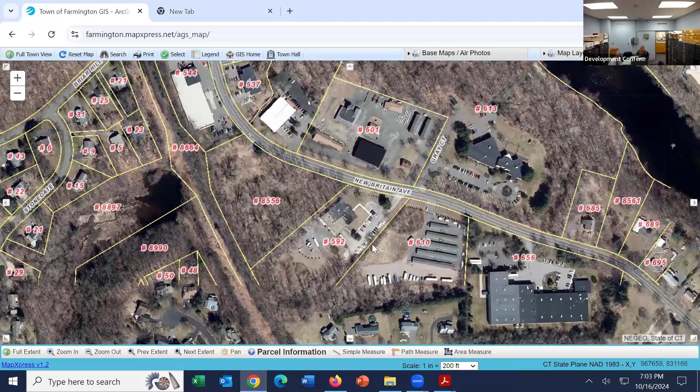Bruce is showing us where it is. There's the highway right there, and there's the vacant lot, and the M&J bus is right in this area here. So it's between the bus garage and the town garage, with the rails to trails in the rear of the property.

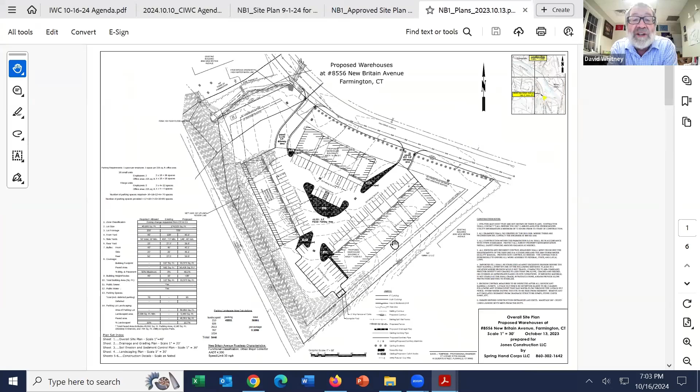Last year your commission approved a site plan for this property, including a considerable amount of activities within the 150-foot upland review area. I was not involved in the project at the time. This is the site plan here that you're seeing from that application. There are no wetlands on the site, or maybe just a small portion of Hyde Brook.

The only wetlands are the watercourse itself, which comes underneath the old train track, the rails to trails, and then flows down to New Britain Avenue on the town's property for the most part, and then goes underneath New Britain Avenue. There's no adjacent wetland soils like sometimes you have. The wetlands were delineated by Eric Davison from Davison Environmental, and there's a report on file.

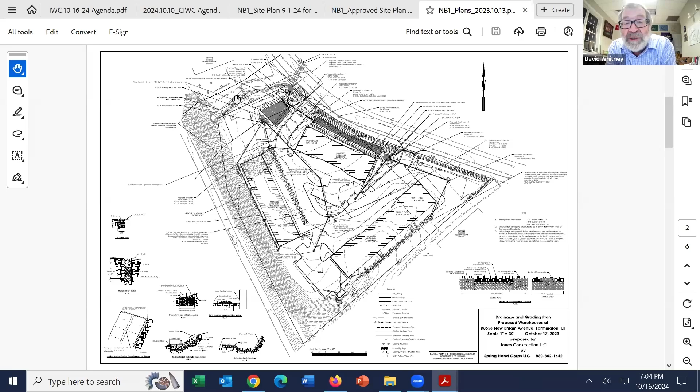Bruce, if you could just go to the site plan that I submitted with the application. So the Hyde Brook is shown in blue on the left-hand side of the map, and the 150-foot upland review area is shown in yellow. And if you see in the rear of the site, there's two shaded areas. Right there where Bruce has the cursor, the cross-hatched red area is the new area of impervious surface from the approved site plan.

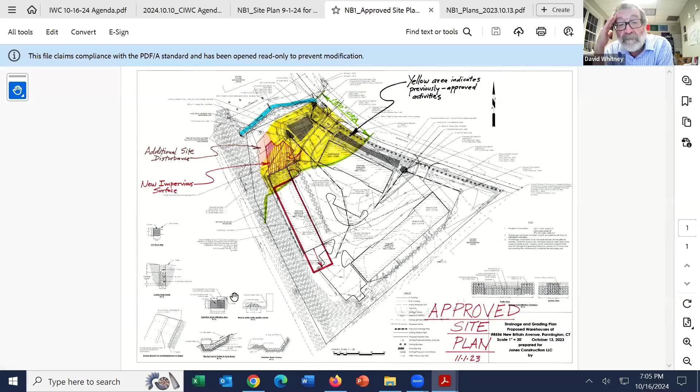And then the brown shaded area there is the new area of site disturbance. If we can go to the plan I sent today, the presentation plan - okay, I've superimposed on the original approved plan what we're requesting in this application.

You can see Hyde Brook is in blue there at the top of the screen. The site is a slightly different orientation on this original plan, but it's the same scale. You can see the green line is the limit of the 150-foot upland review area. That hasn't changed. The yellow shaded area are all the activities that were approved by your commission last year. It consists of an entrance driveway, a detention basin, portions of some buildings. All those activities were approved.

What we're requesting now is relatively minor, I think. We've slid the building in the back over to the northeast, where it's now outlined in red. That's the new location of the building as per the site plan I submitted with this application. And what we're proposing is to put an area of pavement at the northwest end of that building, shown here cross-hatched in red, which will provide some parking and will provide some bays in the building at the northwest end.

So we're adding some impervious surface, and again, that is 3,820 square feet.

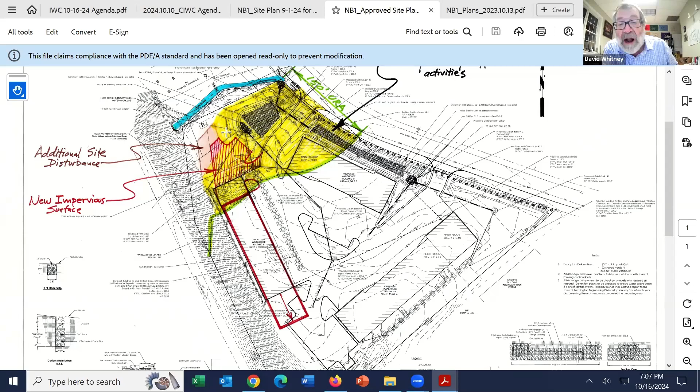Anytime you do construction, there's some site disturbance outside the actual pavement or buildings. I typically use 20 feet as the limit of disturbance, shown in brown where Bruce has the cursor. That additional site disturbance is about 1,600 square feet.

A couple of things I'd like to point out: the area of additional site disturbance that was not on the original plan has no mature trees, it's all scrub growth. And that area of additional disturbance will be vegetated after construction.

There will be plantings, we're working on the planting plan right now. There will be plantings in that brown shaded area and also in the area of that old shed that will be removed. We'll be proposing plantings between the new edge of pavement and Hyde Brook as part of the plan.

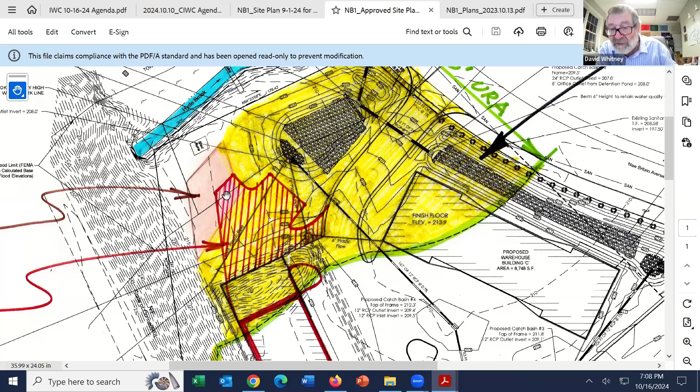The second thing I wanted to point out was the cross-hatched area of new impervious surface. The stormwater runoff will flow to a catch basin in the driveway and bring the stormwater back into the center of the site. Bruce, if we could go back to my plan that I submitted with the application.

If you could show the catch basin in the driveway there, right where he has the cursor, that's the catch basin that will pick up stormwater runoff from the new impervious parking lot and bring it back to our stormwater infiltration and treatment system, located underground in the middle of the site.

From the stormwater system, the discharge for larger storms will go to the detention basin that was previously approved. So what I'm trying to say is the stormwater runoff from the new impervious surface, the new parking area, will not discharge directly to the detention basin and will not discharge directly to Hyde Brook.

So this is a relatively minor change to the site. We've made some changes to the layout, to the buildings, to the storm drainage, to the parking lot from the original approved plan, but most of those changes are outside the 150-foot regulated area.

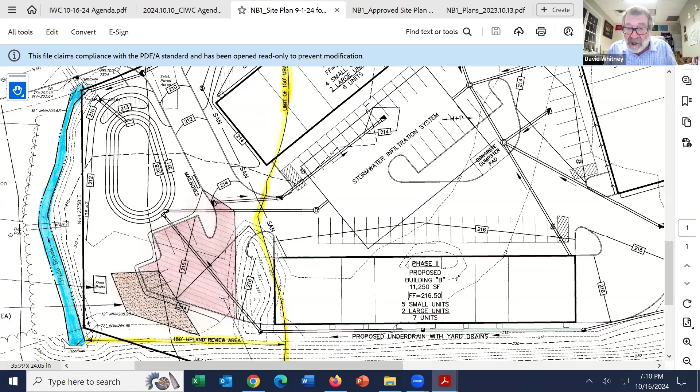So I guess basically that's it. I'd be happy to answer any questions. I guess the point of tonight's goal is to have this application hopefully accepted by the commission and to determine if you want a site walk, because I understand there are some new commissioners who weren't on the commission when this plan was approved, and to determine if this is significant enough to warrant a public hearing. I'd be happy to answer any questions.

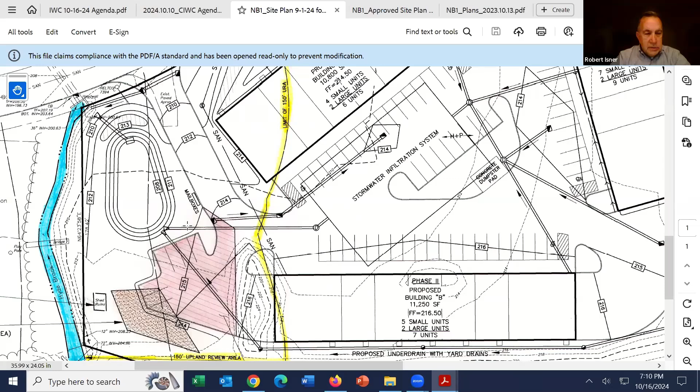David, thank you for the presentation. From my perspective, I don't see the changes as being overly extensive. Clearly you're adding some additional activity in the regulated area. One of the concerns the commission had during the original approval was the visibility of the site from the rails to trail path because it's so heavily used.

So it was good to hear that there are no additional mature trees being lost, it was all sort of scrub brush. But I think the overall planting plan from the original approval will be critical. I'll hear what the other commissioners have to say, but I don't think it will warrant an additional night of hearing, because I don't think the changes pose a significant impact to the wetlands. So those are my opening comments.

I'll go around to the commissioners. Commissioner Berlandi, any questions or comments? I would agree with what you just said. I don't think a site walk is needed, and I don't have any additional questions.

Thank you. Commissioner Fox? Dave, are you on mute? Sorry about that, there you go. I'll agree with you on the non-significance and no site walk.

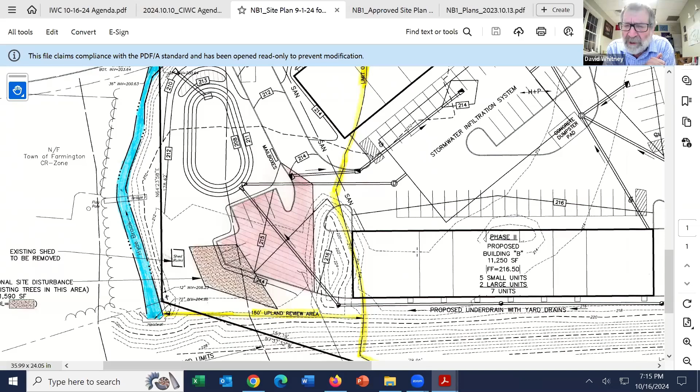So one of the requirements for planning and zoning is that the applicant submit a list of proposed tenants, like the type of tenants that will be using the buildings. So it's not intended to be like daily deliveries of materials. It's not really going to be a place where you stockpile storage materials. It'll more be for contractors to have bays for their equipment.

Yeah, mainly those. I mean, I know what previous commissioners have said, but I'm looking at those 3 parking spots. I don't know, we've approved residential property probably within 25 feet of wetlands. This is double that distance, but at the same time, it's a commercial application, which is different than a residential application in terms of usage and what type of contamination or whatever could happen. So I'm a little, personally, the commission can decide and vote which way they want to go, but I'm just a little concerned about those spots nudging ever closer to that brook.

That's pretty much it. I'll leave it as that, and we don't need a site visit. Thank you.

Thanks, Mark. Commissioner Toulon? Yeah, I actually was thinking, like Mr. Whitney referred, I am a newer member. I wasn't on the commission when this was first approved. So my initial thought was it wouldn't be a bad idea for me to see it, just because it looks like there's some minor changes to the original application, but I'll defer to the others and go along with it. I don't think it's necessary. I don't have any other questions.

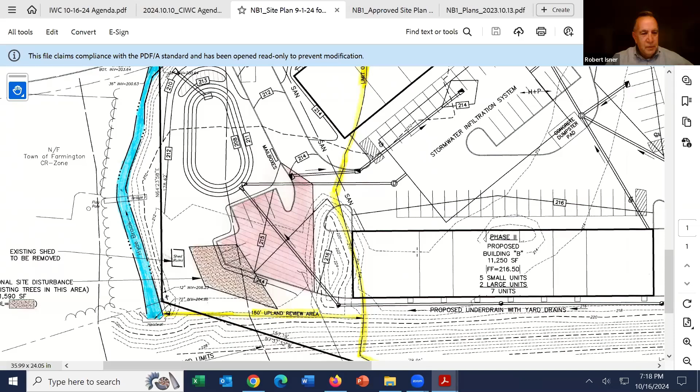So moved by Dave. Is there a second? I'll second it, this is Jay. Thank you. All those in favor signify by saying aye. Aye. Aye. Aye. Opposed? Abstaining? Motion carries. Thank you, gentlemen.

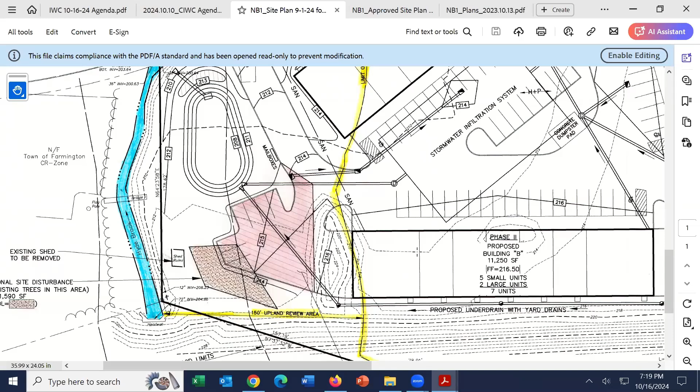Great, thank you very much. Hey, Robert, I just want to be clear, this is a new application, so the fact that I wasn't on the commission during the initial application doesn't stop me from seconding this, correct? That is correct. Okay, and thank you.

Bruce, correct me if I'm wrong, but yes, you're correct, Jay. This is a new application, so, yep, I think we're good with. Yeah, this is correct, this is a brand new application. So that's what I thought. I just wanted to be sure.

Thanks. So may I ask, when is the next meeting? And this will be an agenda item for discussion or vote at that meeting?

November 6th. Let me do my little cheat sheet. November 6th. Get some dates for two weeks out.

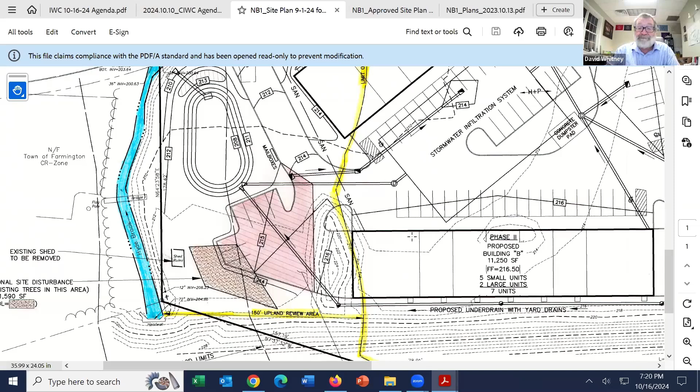Dave, I think we'd probably finish the discussion, and unless there's any major concerns that come up, good chance we'd be voted on next time as well. Thank you very much, Dave. You're welcome.

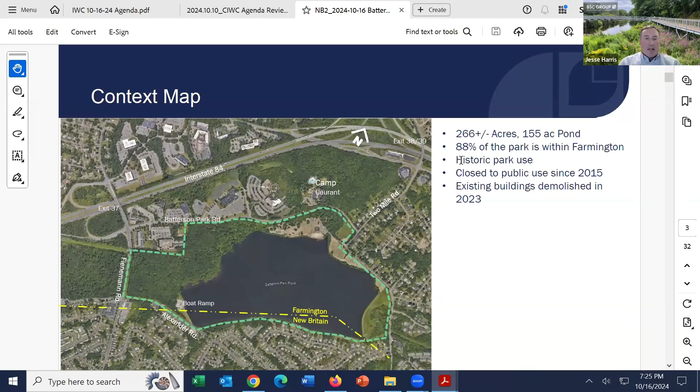Last year, as part of a more in-depth master planning effort that BSC Group was part of with the city of Hartford, prior to the change in direction of ownership or management that Paul mentioned, a series of on-site buildings, picnic tables, and pavilions were demolished and removed from the property. I believe that project came before this commission to get approval for that work as well. Next slide, Bruce.

The park, when we've been visiting, has been just kind of overgrown. The city did go out and mow some of that this year to try and keep up with maintenance, ahead of knowing that we're hoping to get improvements constructed in the next few months, over the winter and into spring of 2025. So they got a jump start on mowing some of the brush and overgrowth.

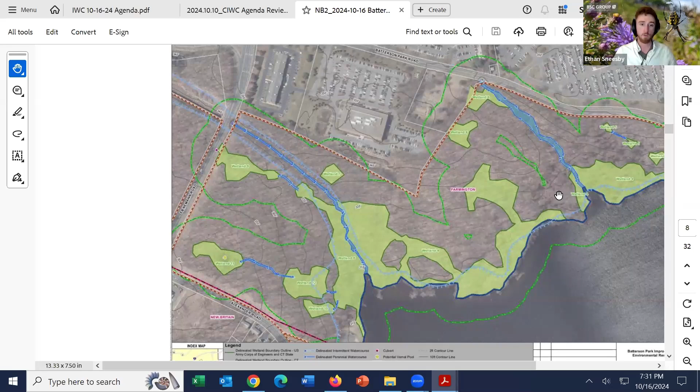A little bit more detail on wetland 4, one of the ones that's closest and incorporates quite a large area. The area closest to the development has a lot more scrub shrub cover, and has a higher percentage of invasive species in that area.

You get a fair amount of barberry and oriental bittersweet, and those sorts of species. That's essentially what we have going on here.

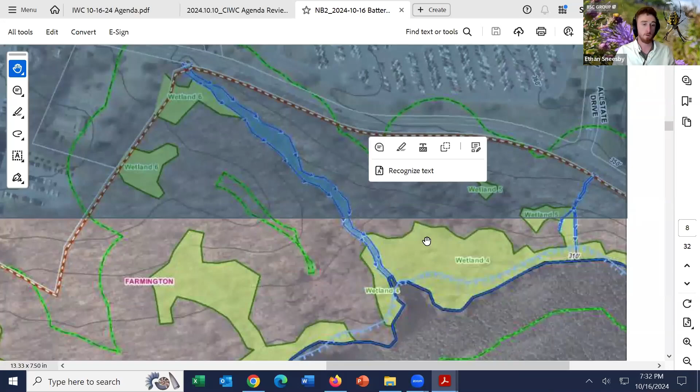Wetland 6 and 5 are both receiving stormwater flow as well as a bit of groundwater discharge in those areas. There are 3 perennial streams on the site: the large one that abuts wetland 6, the one within wetland 2, and the one that abuts wetland 8, southwest of here. The rest of the streams mapped on the site are all intermittent streams that tend to flow with rainfall.

I believe I have a lot of photos coming up in this slide that'll help give a little bit of an idea of what we're looking at in terms of what the wetlands look like. I think we can go to the next slide.

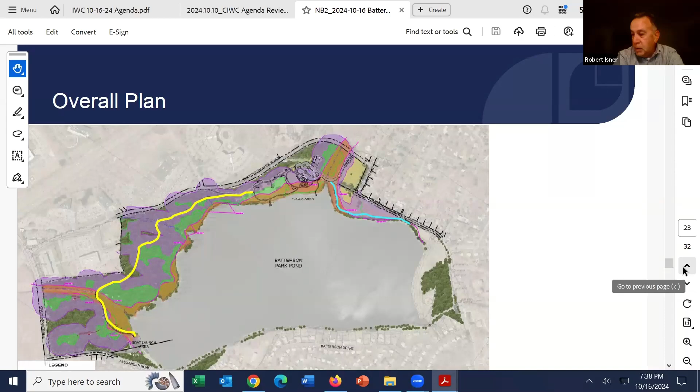For the vernal pool, this commission has talked a lot about vernal pools in the past, and we give heavy consideration to them. So if you weren't able to do the assessment of aquatic and amphibian life, I think for permitting purposes you should assume it is a vernal pool. If there is direct impact proposed with this application, my opinion would be for the commission to look for offsetting mitigation. I'd give a lot of consideration to recognizing that, while we have a 150-foot upland review area, the recommendation in the industry is to have a much greater protection area for a vernal pool. As we layer through the application process, I can touch on that—it would be important.

In terms of the impact areas, the vernal pool is actually the furthest wetland from any of the impacts. I believe we have a path going through the woods which would be outside of that upland review area for it as well. So of all the wetlands on site, I think it has the least chance of having any impact to it. Yeah, that's it right there—thank you for mousing over it.

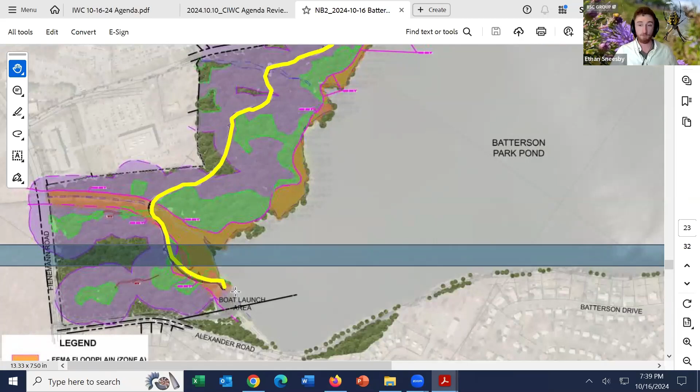I do agree that assuming it's a functional, high-value vernal pool is worthwhile. I fully agree with you there.

Thank you. I'll go around and ask the commissioners if there are other questions or comments. Commissioner Verlandy?

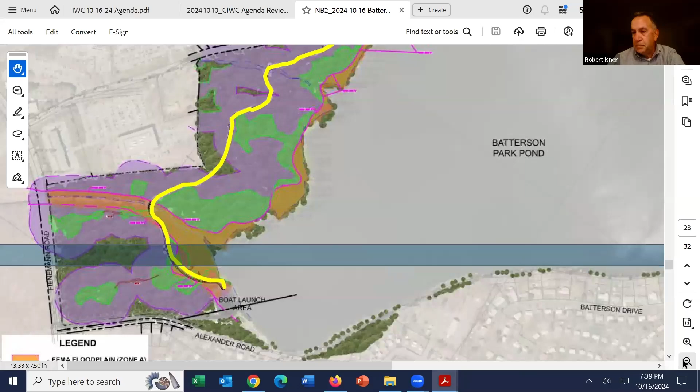I don't have any questions at this point, but I'd be interested to see further on. That's all I have.

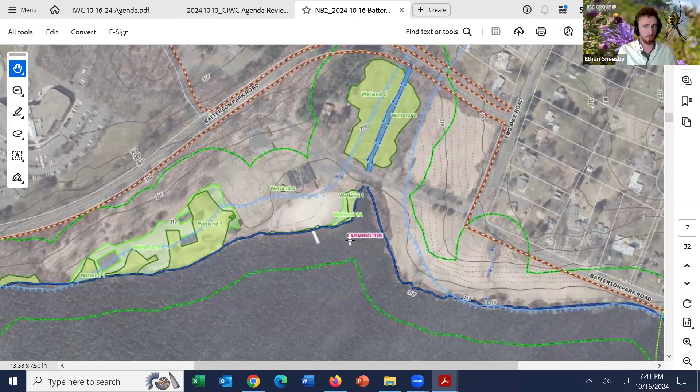There are viewing platforms planned within wetland 1, and a kayak launch is also going to be there. Those will be discussed a little bit further into the presentation.

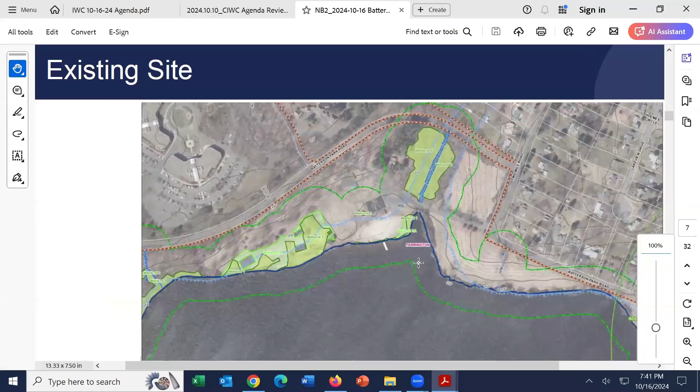I guess if you have specific questions about the wetlands, the impacts are specific to the wetlands. That's a good question.

Commissioner Kelsey asked about the asphalt. When the buildings were torn down, was any asphalt left, or has it all been taken out, or left undisturbed? None of the asphalt for the parking, the existing drive, or those three rectangular spaces has been removed - they're still there.

Are those actually in the wetlands area? When you say removing that will restore the functionality of the wetlands, can you expand on that? Yes, they are within the wetland. They're raised, probably with a base of gravel or something similar underneath the asphalt. The intent would be to remove the asphalt and bring it down to wetland grade so it could gain wetland hydrology and begin functioning as a wetland again.

On that mapping within wetland 1A, there are a couple of squares that seem a little odd - those are the courts, the basketball courts or picnic area that would be restored. I'll go into a little more detail on those later in the presentation.

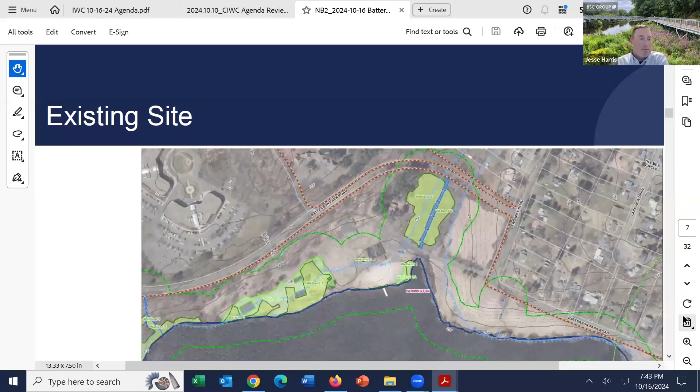Does any of the asphalt path go through the wetlands, and what are your plans for that? Yes, it does, and I'll go into that in a little more detail. Nothing further for me at this point.

Commissioner Simons: I have a few questions, but I'll hold them off until the end of the presentation. I definitely believe, having walked that path with my wife, that is a vernal pool, but I haven't done a species count, so I think it would be better to defer to that as an actual vernal pool if possible.

Commissioner Simpson: I appreciate the city of Hartford coming and giving us this presentation. It would be great to see this park functioning the way it was at one time. I don't have too many questions - I'll wait till the end of the presentation.

Reviewing all these wetlands, I guess we don't like to see disturbance of wetlands, but wetland number 3, the one by that building, was the one that was least functioning. With further presentation and probably a site visit, we'd better understand the impact of what you're talking about disturbing. So at this point I'll wait till further information.

Commissioner Tulin: I was actually thinking about wetland 3 and trying to be clear on exactly what that is. I caught the comment about that being a kind of critical area, but I'll wait to listen to the rest of the presentation before I think of anything else.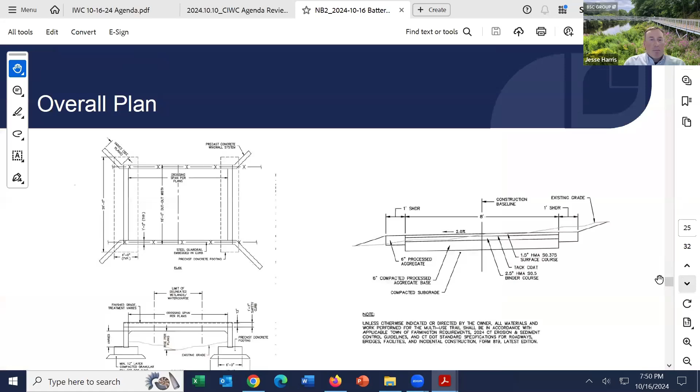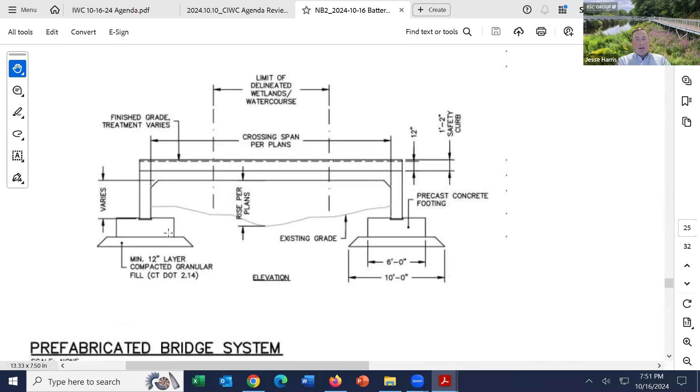And if you go to the next slide, Bruce, it consists of a prefabricated bridge section with its abutments well outside of the wetland limits that will span those distances. Those seem to work quite well in terms of constructability, minimal disturbance, and just ease of construction in these remote access areas.

If you look to the right, Bruce, there's a typical cross section of the trail where it's on grade. It's intended to be a paved multi-use trail, 8 foot wide, with 1 foot gravel dirt soil shoulders on either side, and a typical aggregate pavement cross section below that. The intent is that Riverfront will utilize that as their network of trails for events, but also for ease of maintenance, having it be a paved surface versus gravel—they feel that's easier for them to maintain long term.

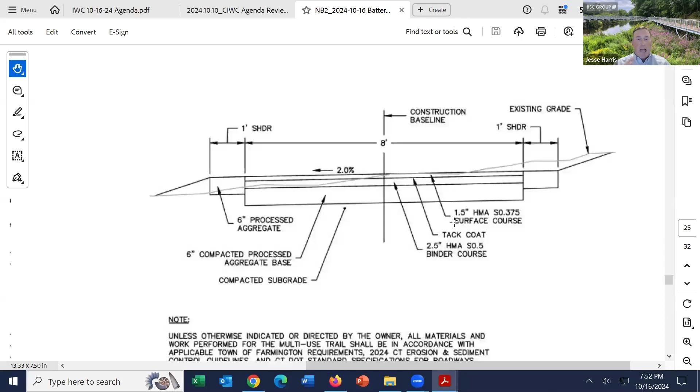And the 8 foot width is based on their desire to have a small maintenance vehicle access it to remove downed trees, even in the case of an emergency in these more remote locations—getting some sort of small emergency vehicle out there for those access points. Where we have that small portion of the boardwalk section by the boat ramp, again, that will meet the same width of 8 foot wide, to traverse that small section of wetlands.

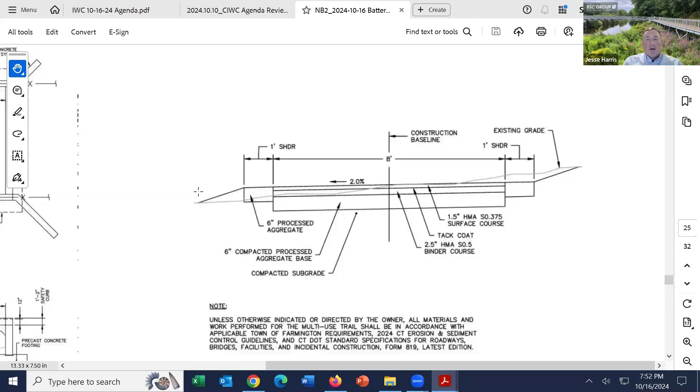Another important aspect of this trail is getting people out in nature, environmental education, and those type of activities. Next slide, Bruce.

So now we're going to zoom into approximately 20 acres in total, but probably really a 10 to 12 acre area of development. This has been the historical location of the park development with the old buildings, the old beach access and beach area, and the site drive. The existing access to the park is right at that tight corner between 2 Mile Road and Batterson Park Road.

We're proposing to close that off and turn that into emergency access only. It also functions as our utility right-of-way—there's overhead utilities, underground utilities, water, sewer, etc., so we need to maintain that right-of-way for that. We're proposing a new access road off of Batterson Park Road to the north.

This gets the park patron traffic away from the residential uses, captures any traffic flow coming from the south before it goes into the residential area, and functions better for the city's needs moving forward as an active passive park.

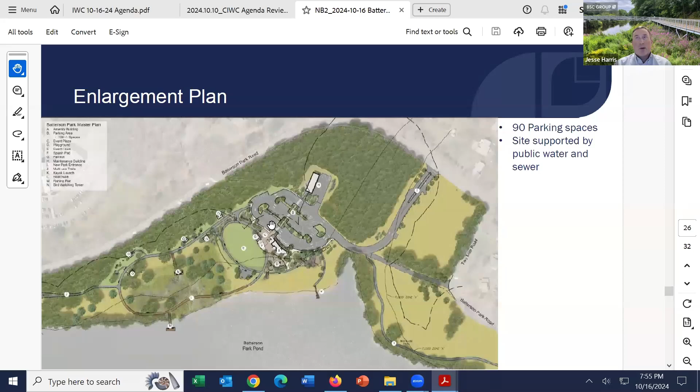Part of the park development is a new park support building, which will have restrooms and a small empty open concession space. There will be no food prep, just a space that vendors can come in and sell food off of hot plates.

That's kind of centrally located at A. We have a support plaza around that for functions and events, seating, tables, possibly some food trucks, that's at C. We've got a small playground of natural materials, so it'd be a wood playground with natural surfacing, at D.

E is our big event lawn. Just as perspective, this is generally sitting on top of the raised mound created by the historical leach field and septic system that supported the old bathrooms.

These new bathroom facilities will be serviced by public water and sewer pumped up to Batterson Park Road, so the old septic system and leach field will be abandoned. E will be that event lawn where they can pitch tents and it'll be a flexible space for them.

Moving out from this core area to H, we have a new maintenance garage, with this semi-remote location still under the ownership of the city of Hartford and managed by Riverfront Recapture. They're both based out of Hartford, so they need a place for maintenance staff and equipment to be on site year round. Again, the intent of this park is a 365-day park.

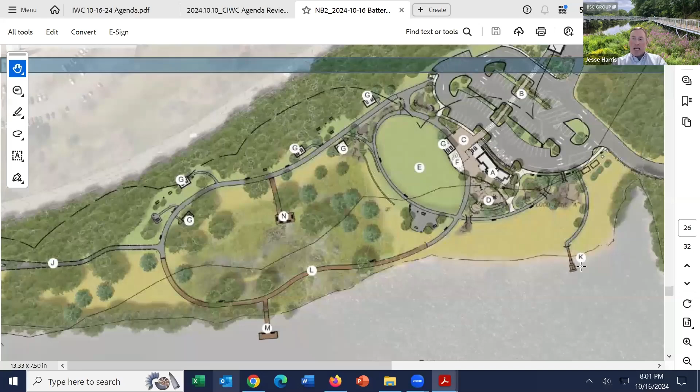Swinging back around to letter K, Riverfront does have a desire to provide non-motorized water access with canoes and kayaks. They're proposing a floating dock system with accessibility improvements for handicapped or mobility-impaired people to gain access to their kayaks or canoes and launch from that point out into the pond.

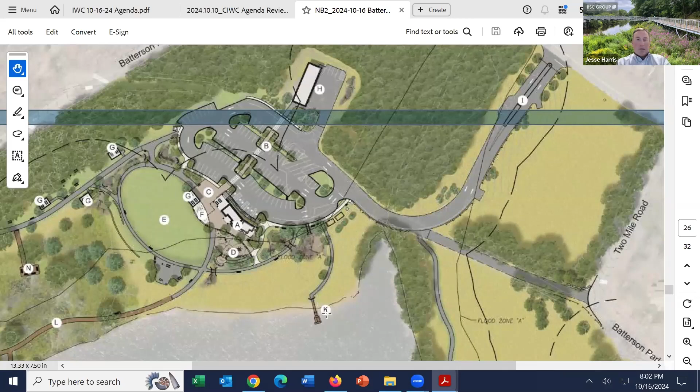So that is one of those areas, about 600 square feet, that we'll be looking to mitigate on site.

Just to reiterate on this one, work within the wetlands totals 4,800 square feet, due to that pocket wetland in the center of the site, with helical piles driven for boardwalk supports, not only in this location but also on that trail connecting down to the boat ramp, plus some minor work for anchorages.

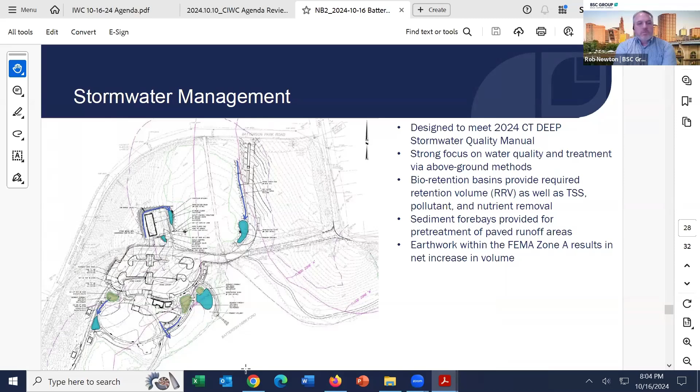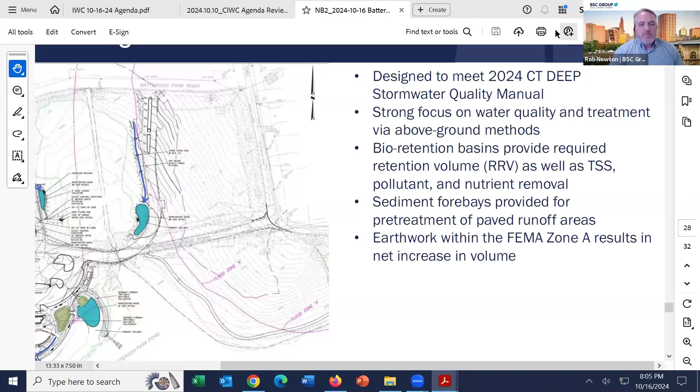Thank you, Jesse. Really, our concept for stormwater management on this property is promoting a lot of overland flow and focusing on water quality. We're looking at creating five above-ground bioretention basins that will help remove any sediments or contaminants that may enter the stormwater flow. I think this will provide the water quality that we need and desire entering into Batterson Park, Batterson Pond. So our focus is to promote water quality.

The soils here, and the topography of the land, really lend themselves to that overland flow, and we try to capture that water and that stormwater quality volume in each one of these basins. We are exceeding the water quality manual's recommendations for stormwater quality volume on the site by use of these basins.

Any stormwater generated from the paved areas will enter a sediment forebay prior to entering into the water quality bioretention basins. We try to capture any of the initial sediments into those sediment forebays, and then the water moves into the bioretention basins. Each basin is designed to safely pass any excess stormwater in a major storm event, and prevent erosion from those major storm events. So our focus here is the water quality volume and maintaining that cleansing of the water prior to entering into the pond.

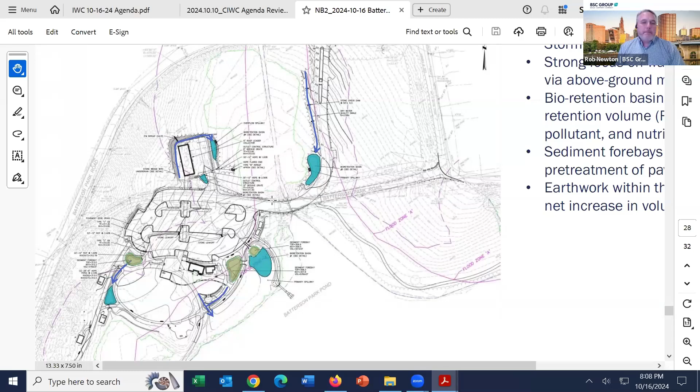To close this out, planting plans show all disturbed areas will be stabilized with either lawn, plants, or conservation seeding. Conservation seeding is highlighted in the darker green, around all the periphery areas. The lighter green areas are intended to be maintained lawn with weekly mowings, while conservation seeded areas would be maintained seasonally.

There's some existing meadows and upland areas that will also be seasonally maintained. As part of the planting plan, we have 102 new trees proposed, including 12 different species of native or adapted species.

The aesthetic and approach to the planting design is really to keep with the pastoral setting that's out there today, meadows, flowing grasses blowing in the wind. And of course we have trees for shading of pavement and the plazas around the core areas, shading for people to sit and relax and enjoy the outdoors and the view of the pond. The plantings will also help support the bioretention basins in their functions.

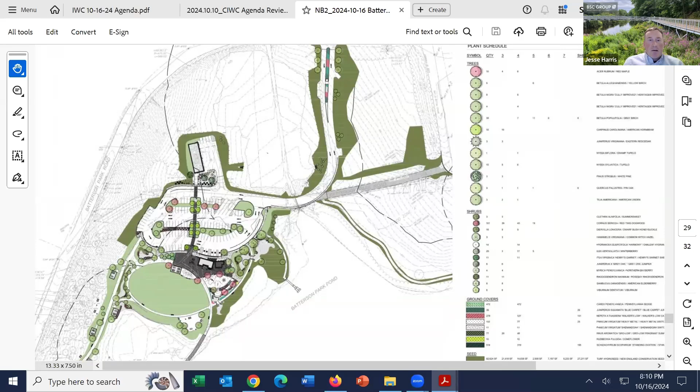Next slide, Bruce. So focusing a bit more on the wetland mitigation restoration areas, we talked about this before. Highlighted in cyan are the paved areas, totaling approximately 17,850 square feet of impervious surface within wetland one. This is the larger area.

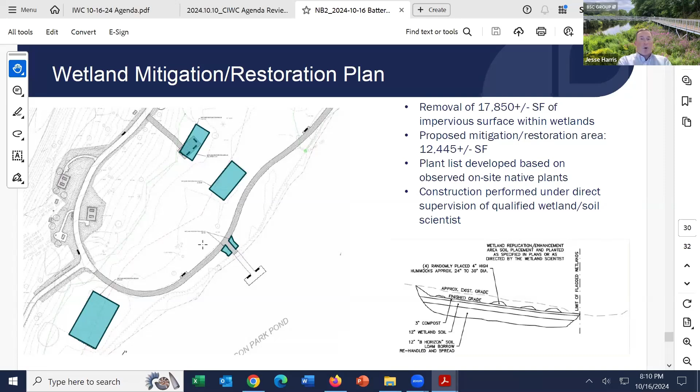We're proposing as part of the mitigation restoration 12,445 square feet. To be conservative, I did not include the area directly under the boardwalk, because that will be shaded. There'll obviously be hydraulic connectivity and function there, but the vegetation will be sparse because of the shade from the boardwalk.

The plant list proposed for these restoration areas will be developed based on observed native plant communities on site, so those will work in harmony with what's out there today. It's shown in the cross section here.

As Ethan mentioned, we're going to remove the asphalt paving, the impervious surface, and the gravel base, bringing that elevation back down to a level that provides and expands the function of the wetland. There'll be a new cross section of wetland soils and plant material. That work will be directly supervised by someone like Ethan or another wetland soil scientist we have on staff.

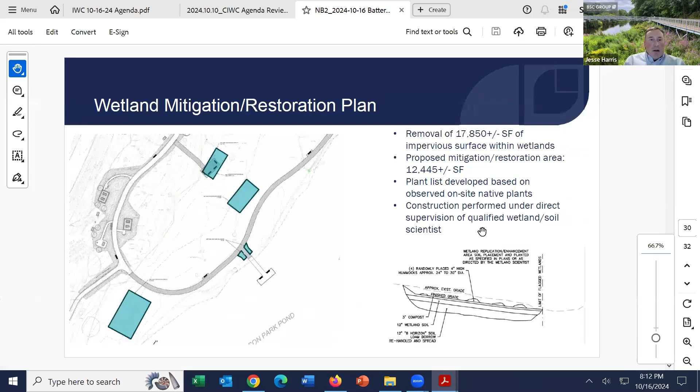I believe that's it. I really appreciate the commission sticking with us through this long presentation. It's a large site with a lot of complex natural resources out here. We're really excited to be at this point with this project, to be in front of you tonight. BSC Group has been involved since early last year, so we're excited to get this project moving and get it back open to the public in the middle of 2025.

Thank you all for that presentation. You obviously presented quite a bit of material. I do have a couple of procedural questions for Bruce.

Because we're close to New Britain, they just have to be notified of the application, correct, or do they also have a review and approval? No, there's just a notification, because there's no actual impact in New Britain.

And is there any jurisdiction with the Army Corps or DEEP, or are we just doing our review and action independently, and any other approvals would occur concurrently but wouldn't affect what we do, correct? At this time, no, because I'm going by the estimates they put together. We haven't had a lot of time to review these in full, but I think they are under 5,000 square feet of disturbance, and there are no Army Corps wetlands being impacted.

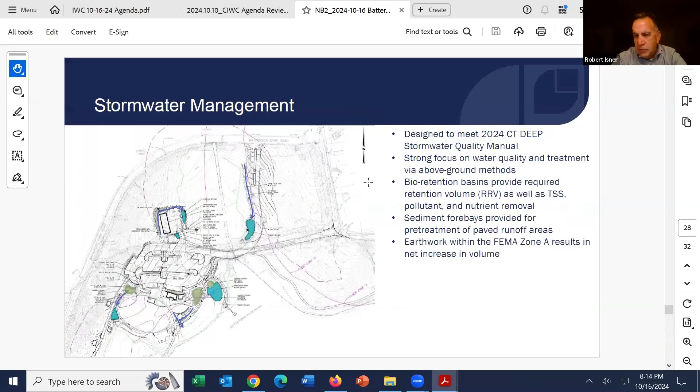Okay, great. I'll start with some questions, and I'm not sure who on the presentation team will handle this. What's the rationale for the new access location, because it looks like there's a fair amount of grading and a lot of work within the regulated area? Is there any direct wetland impact for the new access road? No, there is no direct wetland impact, we're outside of the wetland itself.

We're capturing sheet flow from that paved surface along the western edge with a vegetated swale, and that comes down to one of those bioretention areas right at the bend where it will discharge to the wetland, but there is no direct wetland impact in that area.

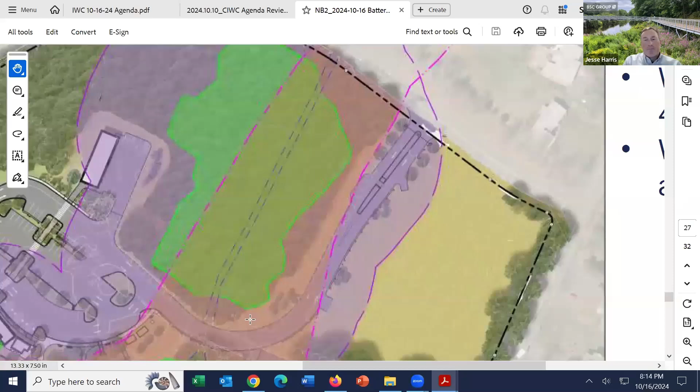Why is the new access point preferred over improving the existing access? A couple things: one is the messy nature of that corner intersection. The geometry isn't quite right there, and the width of our driveway on site is constrained by utility poles, plus large mature oak trees we want to preserve, and some topography changes. Looking back at the pictures I showed earlier, it's not a full 24-foot width, so we wouldn't get clear two-way traffic through there. We discussed this early on with the Chief of Police and the town engineer, looking at a way to get that traffic and entrance out of that corner.

I'll move on to the other commissioners since there are probably a lot of questions. My perspective for the rest of the commission would be definitely to do a site walk, and I'm thinking this would have to be a public hearing, given there's 4,000 plus square feet of direct fill area and acres of work within a regulated area. But I'll hear from the other commissioners.

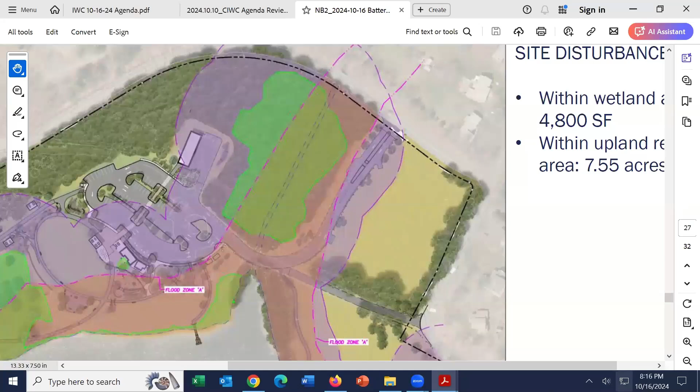I had an additional follow-up about the access road. Looking at this presentation this afternoon, on page 32 it shows an access road that's a little further away from the wetlands. I was wondering if that's still being considered.

We had a meeting with town staff last week, and this was something Bruce brought up. In response, we looked at that option. There is an option to pull it further away and actually maintain the existing tree line that runs along the bottom of the slope there. So that is a feasible option we could consider.

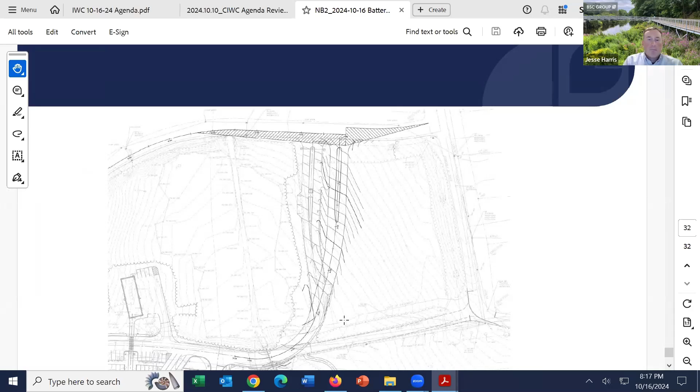Okay, thank you. That's all I have at this time.

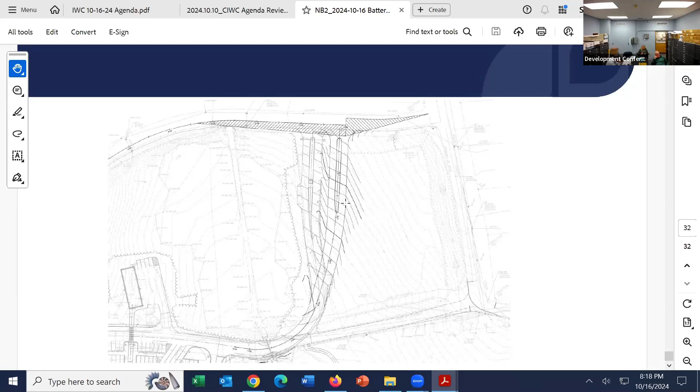Commissioner Kelsey: I agree with Commissioner Eisner on significance, site walk, and public hearing. Just a couple quick things now, and I'm sure I'll have more as we go through the process. On the trail: are the raised boardwalks and bridges going to have railings? And my understanding is that trail is primarily asphalt. From rails to trails, we've had continual problems where tree roots grow up, buckle the pavement, and eventually create a safety issue, requiring them to be dug up and redone. I'd like to hear your thoughts on how to mitigate that, or your plans for maintaining and keeping the trail safe over time.

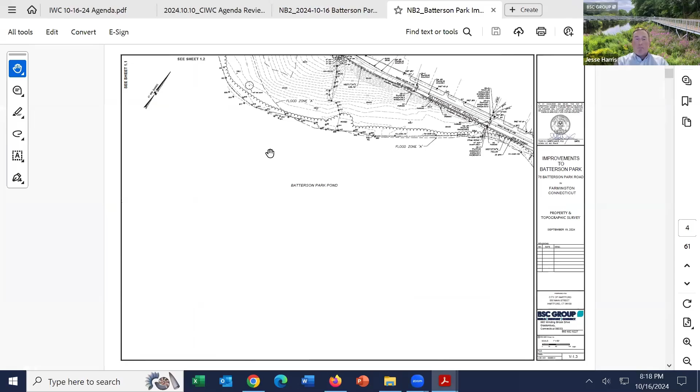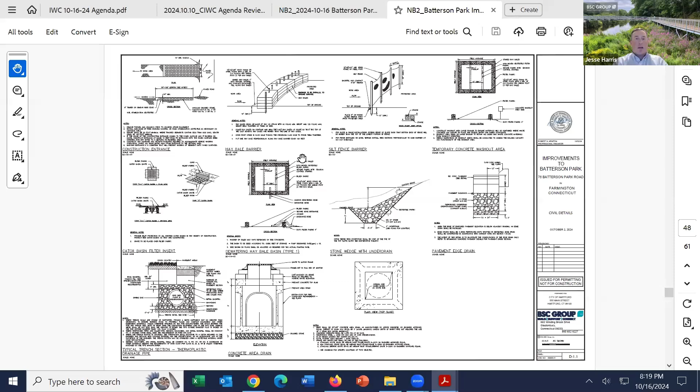The boardwalk through the wet meadow is intended to be very low, so there'd be a curb but no railings—we wouldn't exceed the 30-inch height difference. That's to minimize visual impact, both within the park and for the housing across the pond, avoiding big rails obstructing views. Where things cross the stream channels, there will be some sort of guard or fence to prevent people from falling off the edge. That's a good reference image of the boardwalk through the wet meadow.

On the tree roots, that's a tough one—Mother Nature's going to do what she does, and we can do our best to maintain it. It's a compromise of tree health and mortality, and maintenance. Riverfront Recapture will maintain this park in perpetuity, and those things will be part of their operations and maintenance plan. Those members aren't here to speak about that tonight, but hopefully as we go through this process, if we need to, they can attend.

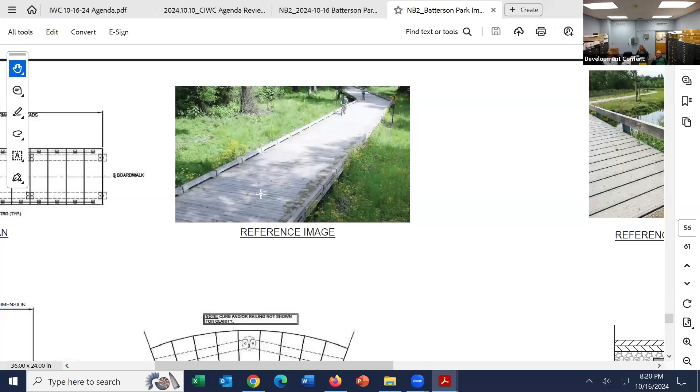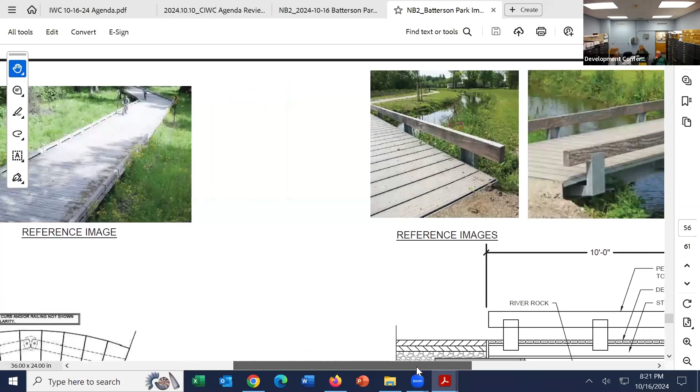Down the road, I'd like to hear more about whether you're cutting any trees or clearing any canopies, because all that maintenance work has occurred on the rails and trails—if you go through it, you'll see trees along the trail cut down to try to prevent roots from coming back up. So if there are any plans around that, I'd like to hear about them. That's all I had tonight.

Thank you. Commissioner Simons?

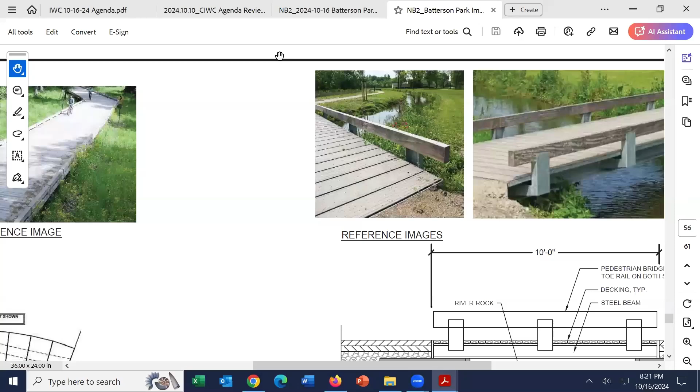Yes, I've been following this closely. I know there's a $10 million grant, and there's even a proposal for the Passport to Parks fee to increase to make sure everything sustains. But my question, since this area has been neglected for 10 years, is there a master plan for resilience in case the proposed 50-cent increase doesn't go through and the $10 million gets exhausted? Is there a plan to make sure what you're installing is strong enough to withstand not being maintained for a time, in case of financial difficulty? I feel like I'm being a Debbie Downer, but I need to voice that, especially since this has been 10 years in the making.

Through you, Chair, if I may. Paul Drumming, City of Hartford. Great question. So we're taking measures. A portion of this funding from the state, the $10 million, is going to be put aside in a lockbox for future capital improvements years down the road when things need it. And then the day-to-day oversight and maintenance of the facility will lend itself to extended life on all the elements within the park.

One good example of that long-term durability is the boardwalk itself. We're looking at a precast concrete product versus wood. Concrete is much more durable than wood—it doesn't warp, doesn't check, doesn't catch fire if that happened. So those are some of the things we'll look at as we get closer and really start crunching numbers to see what fits within the budget. I'd also put out there that some of this could be phased depending on how the numbers come in.

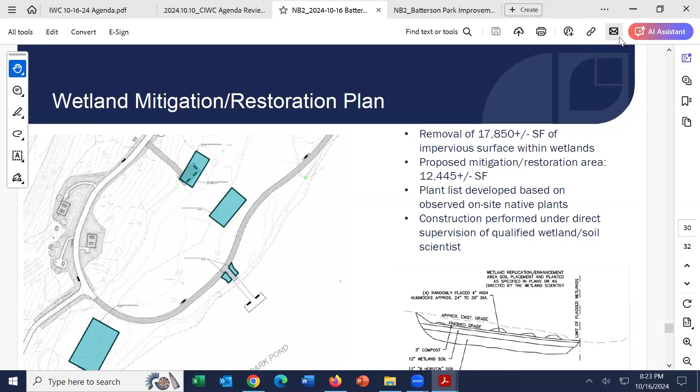Commissioner Tulin? He stepped out. Okay, he had to excuse himself. Sure, okay. Then I'll have the final word from the commission.

I think as the application moves forward, additional enhancement for mitigation of the vernal pool would be good. I know you said that area isn't going to be actively developed, but I think it's probably a unique resource on the property. It's really a balancing act—you're going to revitalize the whole area, balancing some impacts offset by increased enjoyment, recreation, and education values. So giving consideration to what can be done to protect and enhance the vernal pool long term would be a nice addition to the overall plan.

So Bruce, I think at this point we'll accept the application, and then you'll work on scheduling a site walk. It's a big site, a lot to cover. So administratively, Bruce, is that correct for our next steps? Yeah, I'd like to accept the application, and due to the complexity of the site walk, I'd like to have a 5-minute discussion with everybody and the applicant so we can choose a date that everyone feels is acceptable.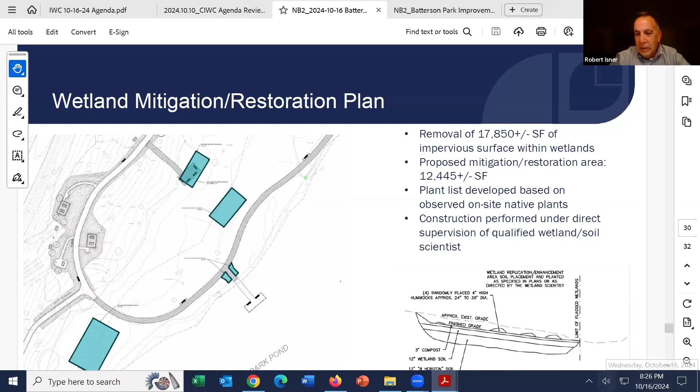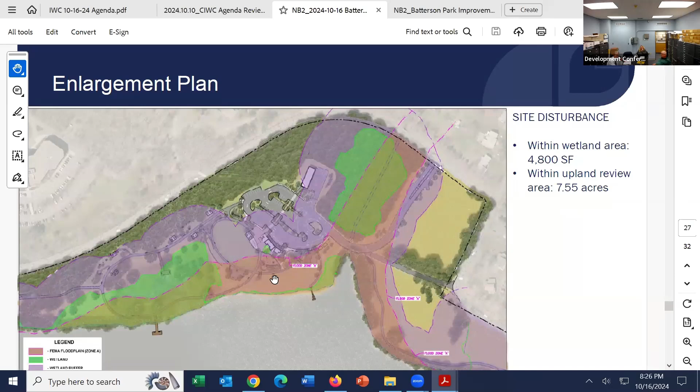I think so the applicant is aware, for the site walk we're probably talking about key areas—looking at this driveway entrance here, up along the wetlands, proceeding down through here, and from there whether the commission wants to continue to the vernal pool, doing the whole walk out to the far end to the boat ramp. So is that what we're looking at? Maybe a couple of these stream crossings too, to get a gauge of understanding. The wetland is over here, with potential vernal pools here, which ties back into the boat ramp, so I'm assuming we'd want to walk a portion of this as well.

Is it readily walkable, Bruce? I'm assuming the brush isn't overly difficult, but I can't answer that because I haven't walked this deep. It would probably be worth coming in from the boat ramp for the wetlands, and then coming in from the park for the development area. That tighter area is fairly thick and pretty steep in parts. The flat parts are fairly brushy and the steep parts are steep, so it might be worth coming in from the other side.

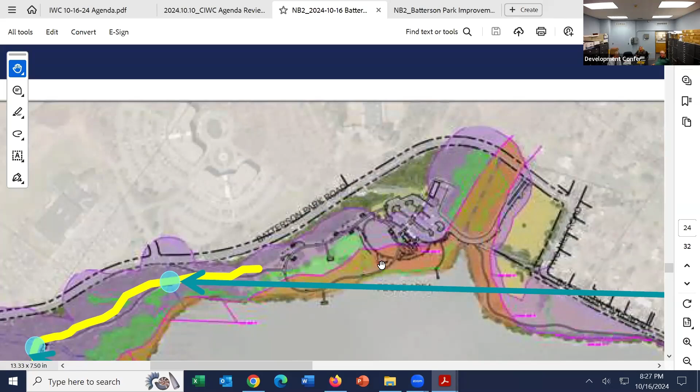We'd also want to see any of the wetland flagging that's there, so the commission could understand where the wetlands are. I think we know the general locations, but understanding this location with the driveway, as well as some of the flagging out here for this wetland and this vernal pool, so the commission can understand where the trail is in relation to these improvements, as well as the driveway into them. Do you guys need any timing to walk out there and make sure that's done?

The flags to the south where that vernal pool is were recently done, so those should all still be out there. The flags to the north along this driveway, that's all wooded, those should still be there too. The ones in the meadow, I'm not sure - those were little wire flags with pink ribbon, and I don't know how extensive the mowing was that was just done a few weeks ago, if they went crazy and mowed all that.

If I may, could BSC get somebody out there before end of business on Friday to make sure all the flags are in place, if the commission was available on a beautiful weekend like this one?

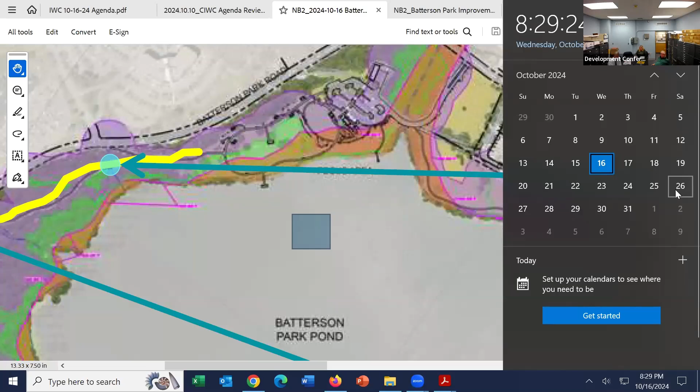I think this week may be a little soon for some other people as well. So I've got a few dates here - maybe thinking as early as the 20th or the weekend after. That would probably be looking at... let me get my calendar. The 19th is a no, so maybe the 20th, the 26th, or the 27th. How are those dates for everybody?

I could do the 20th or the 27th. Same for me, I can do the 20th or 27th. I cannot do the 26th. All right, 20th or 27th is looking good, so either one of those dates.

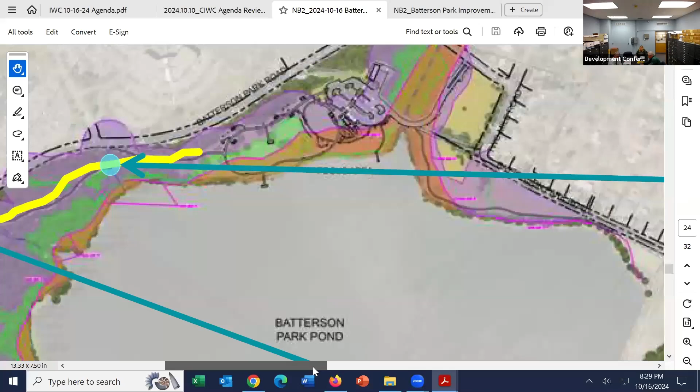Anybody else have any bad times in there? And again, BSC or BCI, if any of these are bad dates, just give us a holler if you can. They'll be available. Have some of you guys as well as Ethan there too. We'll make ourselves available. Absolutely. Paul, can you be available? Yes, they'll be available.

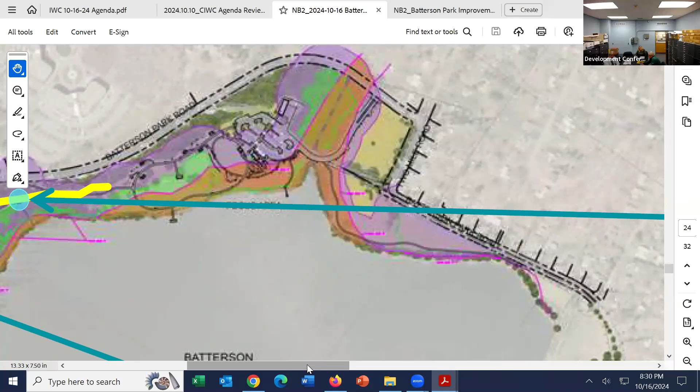I can't do the 20th, Commissioner, but I can do the 26th or 27th. All right, so the 27th seems to be an acceptable date for everybody. Great, so we'll throw that out - the 27th.

Commissioner Simpson, I would not be available. I believe I'm scheduled for helping out with early voting. Let's see what else... you know, I've got to check my time. Maybe it's not the whole day, maybe it is, I can't remember.

Do you want to get back to me? Because it depends on what time we can... we can make these things early enough, so maybe you can get there, at least see a good part of it, you know?

Well, right now I'm looking at it, it says 10 to 6. I'm doing early voting, I have to be there half an hour earlier, so 9:30, and then you clean up. So I would say that Sunday, the 27th, I will not be able to attend.

The 26th doesn't seem to work for anybody either. That was a bad day. The 26th would be better for me. That would be fine, but do what you have to do. What we could do is still go for the 27th. If we need to, you and I can go down there separately, after work or whenever, and I can give you the summary of what we saw. All right, let's shoot for the 27th at this time.

We could also have the team out there to meet the commissioner on a separate day as well. I'll let you know. And then what I could do, if that's the case, is offer two days, and the commissioners can pick whichever day suits them best. Yeah, that would be good.

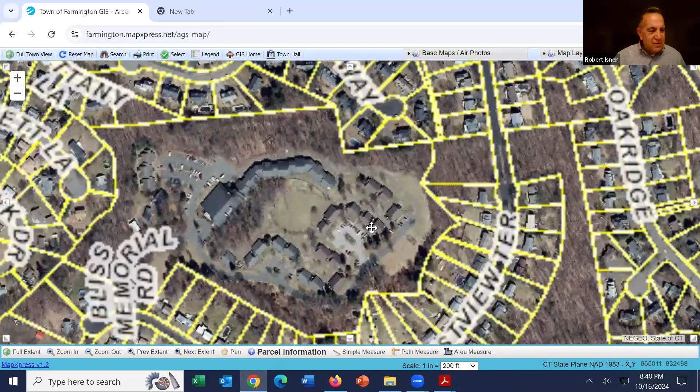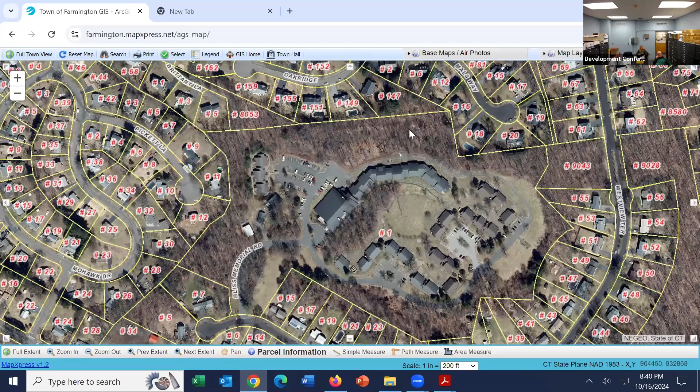Okay, planner's report. Bruce, tell us what we need to know. Yeah, I do have one item that popped up yesterday. I received a call from New Horizons. If anyone's familiar, they did an expansion and some basin work, some housing up along this area, some site improvements, and improvements within the basin. There's been some concerns with the quality and condition of the trees within the basin. They had me out there yesterday. They had flagged about 10 or 12 trees that need to be removed. I'll give you a sample of what some of the trees look like.

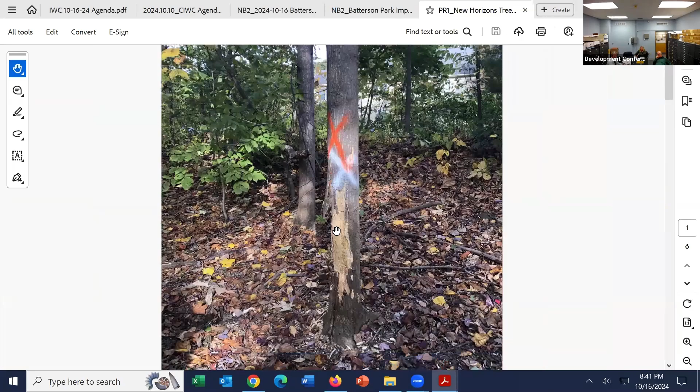Here's one of them. I think that's a deer. I'm not a hunter, but I'm thinking that's a deer because I've been seeing a lot of that lately in the woods. But here's another one.

Here's one. They're all dead, no foliage up there. A lot of the bark has been peeling off. They range anywhere from 10 to let's say 30 inches in diameter. Some of them are leaning and some are in need of imminent removal.

So I discussed with them that I would bring it up in front of the commission. I just so happened to be having a meeting and thought maybe we could do this just under a planner's report, unless the commission felt an application was something they'd like to see. So I'll leave this to Bruce.

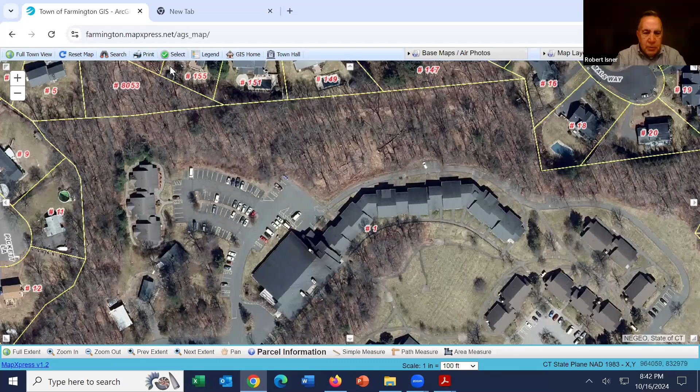Bruce: My thought is if they're just taking down the trees and not going to pull the stumps, I'd rather have it as an administrative matter. It's a safety factor. If they're going to pull the stumps, I'd want to see an application. No, all the stumps are staying. They're going to cut them as close to the ground as they can, and then just leave the stumps. That has minimal disturbance, and it's a hazard leaving the trees the way they are.

Exactly. Okay, is that wetlands in there? It's considered a wetland, yes. It is considered a wetland, but it's a stormwater detention basin wetland. Okay, so Bruce, are all the trees dead?

Not all, some. Again, they are a non-profit, so that's part of the problem. They don't have the money to go through and do all of them, so they had an arborist go in there, and they more or less just tagged the worst trees at this point. It'll be something they may do next year - one or two more if two more die. So it's something they'll do on an as-needed basis only. And I know there's been some discussion between New Horizons and the residents in the back who have concerns with some of the trees leaning towards their houses and property. So that's kind of what's instigating this.

Yes, I agree with Rob that we could do this as a course of business through the planner's office. I'd just like to reiterate with them that they have to keep asking, right?

Yes, they can't just do 10 this year with permission and then start doing more. They're pretty good, I have a good rapport with the groundsman, and that's why he called me to say, hey, I gotta talk to you about this. So I will definitely let him know that he needs to keep coming back.